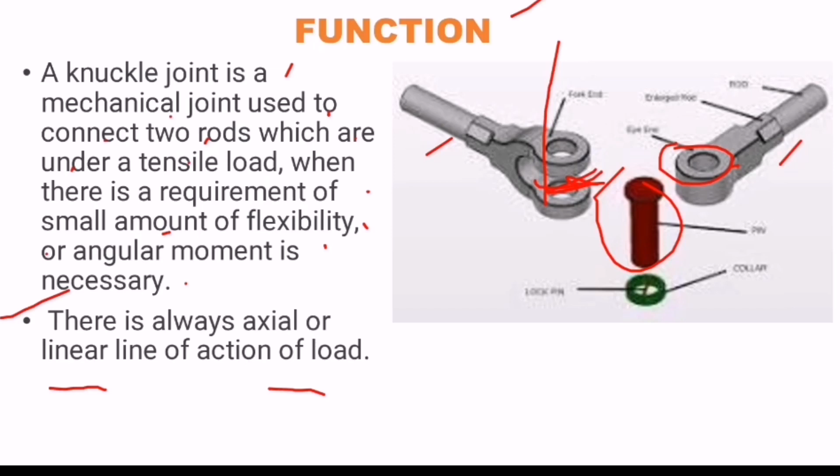So when there is a requirement of small amount of flexibility or angular movement is necessary, look at this. This is going to insert into this, so this pin is going to insert from this. So there is always axial or linear line of action of load, means this is inserting into this and they are easy to rotate. The question of the production drawing of this knuckle joint is, this is the assembled figure.

The question asking like component drawing views, limits, fits and tolerances, geometrical tolerances, surface finish, process sheet. This knuckle joint consists of 5 parts. First one is fork end, second is eye end, third is pin, fourth is collar and fifth is taper pin. 5 parts are there clearly indicated in the figure.

So the question asking about drawing the component drawing means individual parts. Next, limits, fits and tolerances, tolerance symbols, geometric tolerances, surface finish and process sheet. Process sheet is very important. Process sheet indicates a step by step procedure to produce particular object.

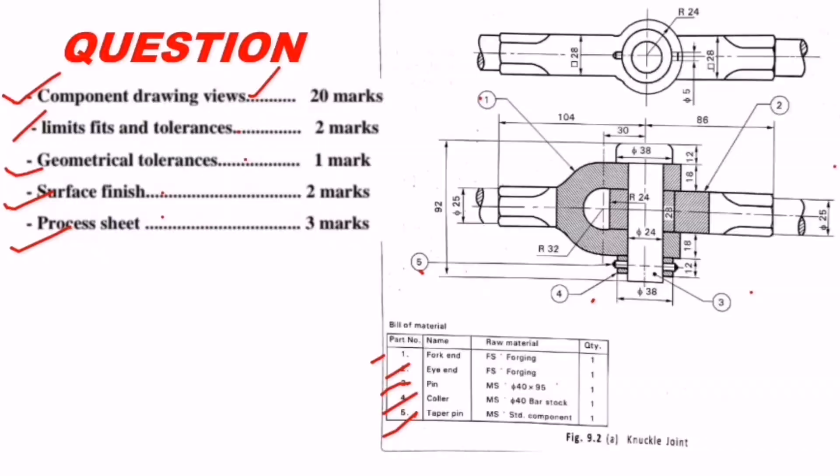This is the answer. First answer is component drawing, so we need to draw the individual parts. So 5 parts drawn individually. Look at this. First one is fork end, this is fork end. Second is eye end, this is eye end. Third is pin, this is pin. And fourth is collar, so this is collar. And fifth one is taper pin, this is taper pin. So these are the 5 important parts individually drawn or disassembled from the assembled figure.

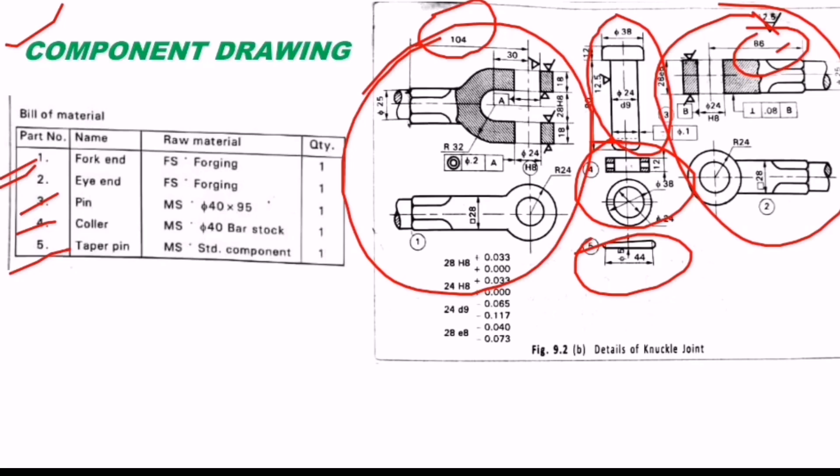So the important thing is that we need to maintain always the given dimensions. If the question given like 104 dimension, we should maintain 104 length only. If it is 86, we need to maintain 66 only. Like that, whatever the length given in the question, that we need to maintain in the answer. So we should not take scales like 1:2 or 1:3. If the question mentioned take as per the suitable scale, or as per your wish, if this kind of question is there, you can go for 1:2 or 1:3.

This is the process sheet. Process sheet indicates the step by step procedure to produce a particular object. Here we are preparing process sheet for pin. First of all, skeleton of the process sheet is very important. Skeleton means drawing this table and providing some of the information like part number, description, material, size, quantity, time. Above the table we should mention all these information.

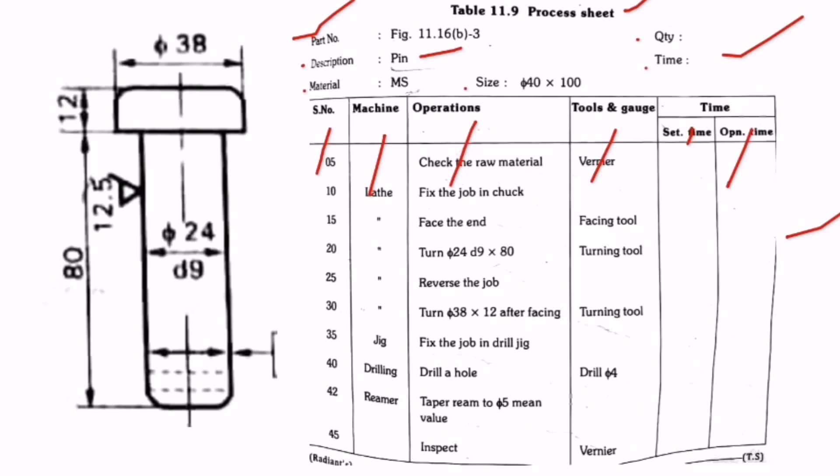And also we need to write the columns like serial number, machine required, operations required, tools and gauges required, setup time and operation time. These columns are important and compulsory to indicate in the table. This is the skeleton of the process sheet. So the part we are preparing the process sheet for is the pin. So for this pin we are preparing process sheet.

First of all, check the raw material. Our first important task whenever we are preparing process sheet is to check the dimensions of the product, or check the size, or check the casting. These kinds of things are very important. Means first important operation is checking. That may be with vernier or screw gauge or normal scales etc. Next, fix the job in the chuck, that is in the lathe machine. Next, face the end, doing the facing operation with facing tool.

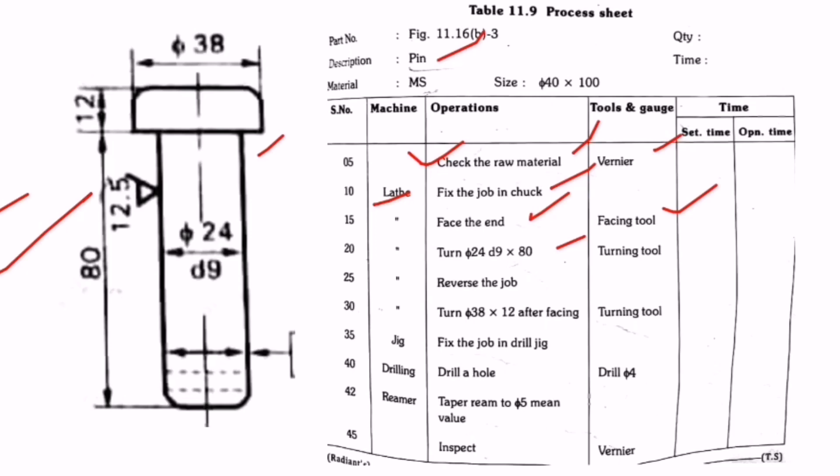Next, turning of 24 diameter into 80. Where is 80? This is 80 and 24 is this, so this into this. So this total surface is turning with the turning tool on lathe machine only. Next, reverse the job, again turn 38 into 12. So after facing, 38 into 12, this is 38 and this is 12, so 38 into 12. So turning after facing with a turning tool.

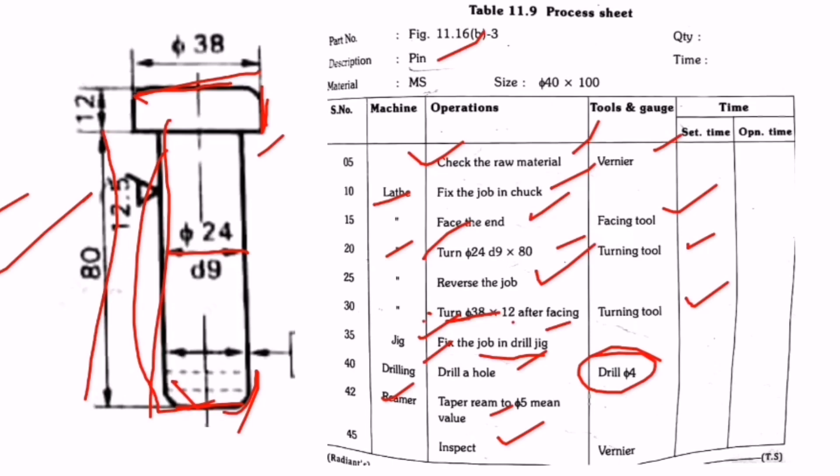So fix the job in drill jig on the drill jig machine. So after that, drilling of holes of 4 diameter. Next, reaming operation, taper ream to 5 diameter, or mean diameter is 5, that is taper at this place. And next is finally inspect the final object. After the final step, we need to inspect the final object. This is the process sheet of a pin which is used in the knuckle joint.

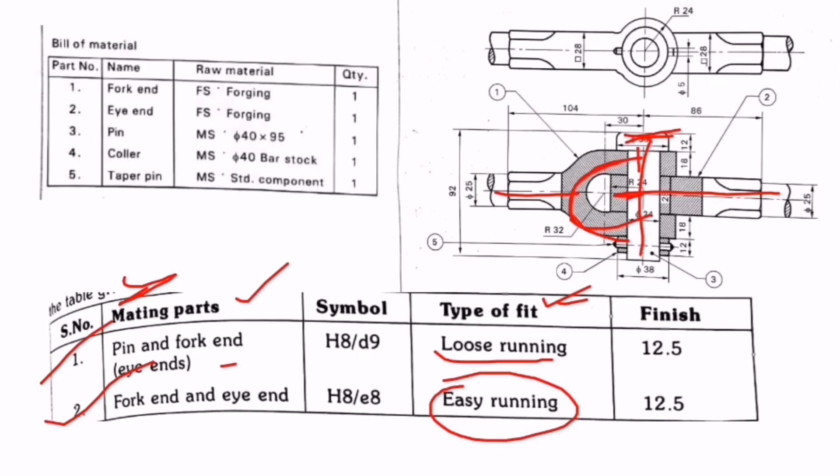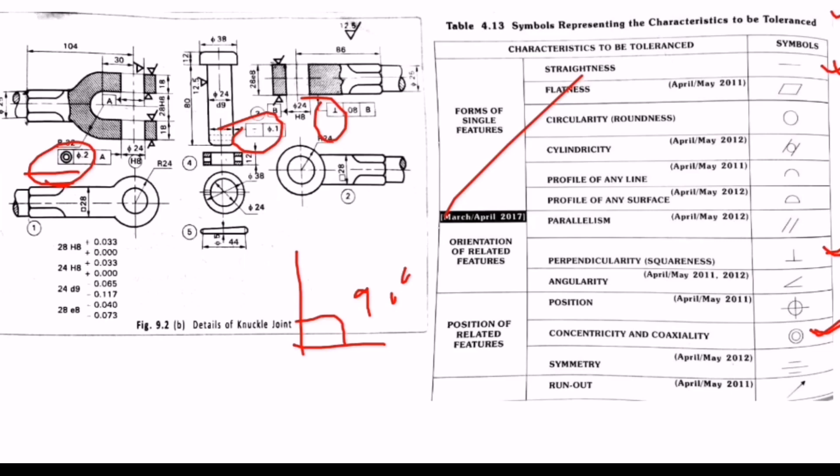How we can indicate means, wherever the lines are perpendicular, 90 degrees, there we need to indicate this perpendicularity symbol. Straightness symbol is used to indicate the straightness of the particular lines, and concentricity is whenever the axis is the same for two diameters, then we will indicate concentricity or coaxiality. This is a way of indicating tolerance symbols in the answer. So this is very important, compulsory, it carries marks. So everyone should by heart this table to indicate the symbols in the answer.

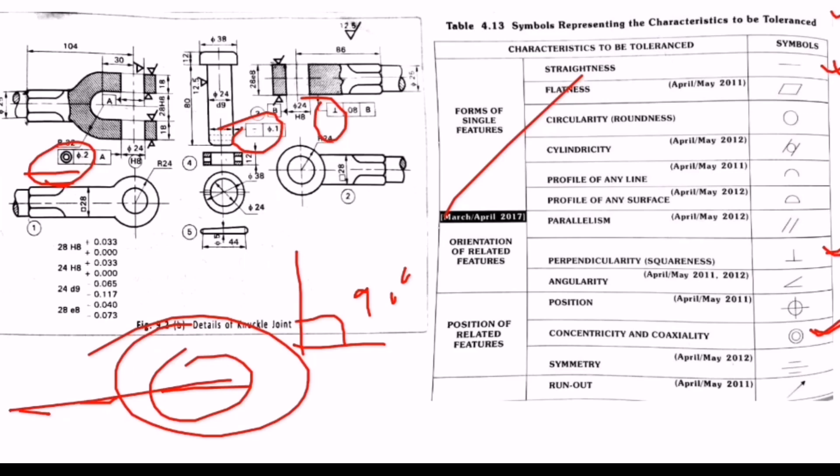Next is surface roughness symbols. There are three very important symbols. So this is a major important symbol. It indicates removal of material by machining. Whenever machining is required, we will indicate this symbol. If you observe in the answer figure, this triangle symbol, this triangle symbol, and these triangle symbols. So these all are triangle symbols which are indicated to show the removal of material.

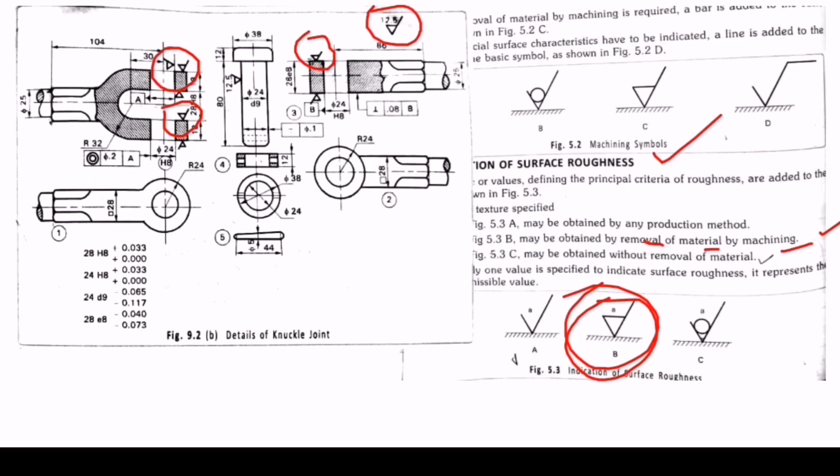Next is surface roughness values. We can see here above the surface roughness symbol, above the triangle, we can see 12.5, and somewhere we can see values like 3.2 or 6.3. These are the important values. Look at this, 12.5 is for drilling operation. Wherever reaming is there, we'll use 3.2.

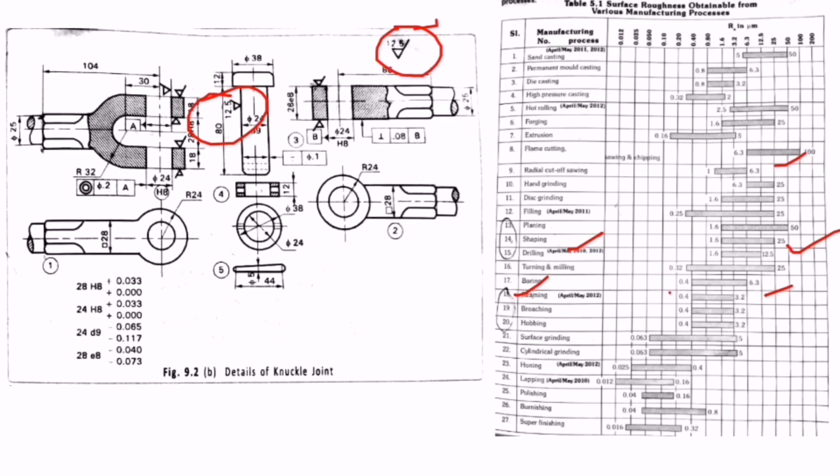Somewhere we can use 0.4 also. Somewhere people will use 6.3 also. These all are surface roughness values which we are going to indicate above the triangle symbol. Here we can see 12.5 above the triangle. This is the symbol of material removal. So above that symbol we need to indicate the surface roughness values.